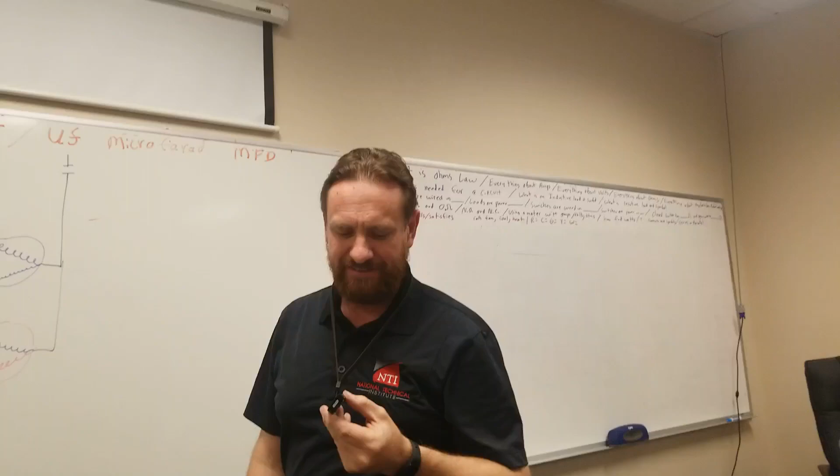All right, start kits. When an electric motor first starts up, you have an inrush of current. The electrons are flowing through this motor extremely fast, running at full speed, whatever speed the windings are supposed to be at. But the motor has lag, it's not immediately up to speed yet. It's like getting in your car and flooring it immediately. It's not going to be up to 60 just yet, and that's a lot of wear and tear on the car getting it up to speed fast.

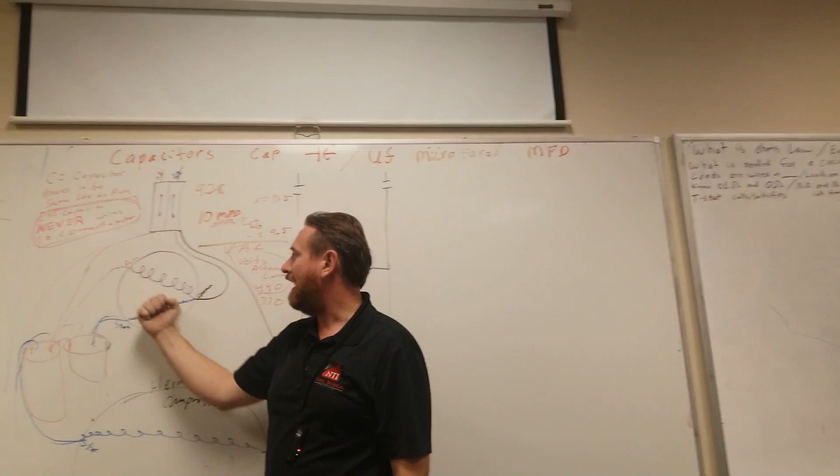So the windings have an inrush of current. As electrons flow through there, it's a very high amperage rating, and those windings get very hot. What is on the windings of that motor? Enamel, insulation. As the windings get very, very hot, that enamel starts to bake and burn off.

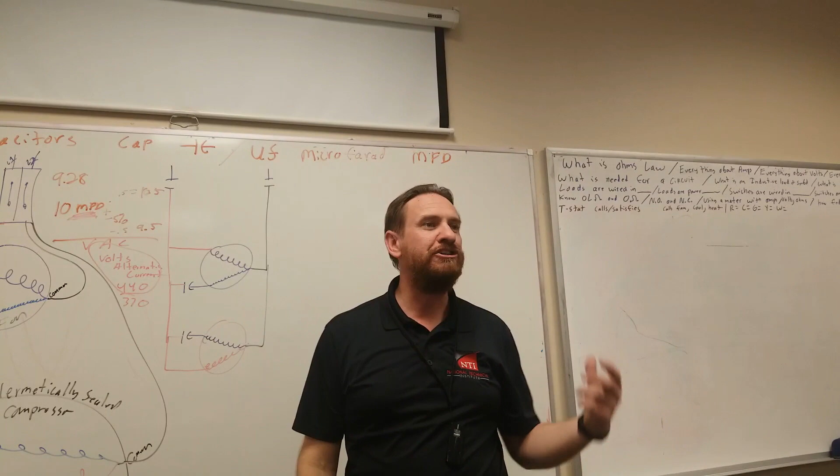Every time that motor starts up, there's a big inrush, so it damages that motor every single time it starts up, plus there's a big power draw. Plus, as all the electrons are rushing to get this motor started, you'll have a voltage drop in the rest of the house. It takes voltage everywhere else, so your lights dim, sometimes when your AC starts up, which can be hard on your electronics like your TVs. It's a big, big problem.

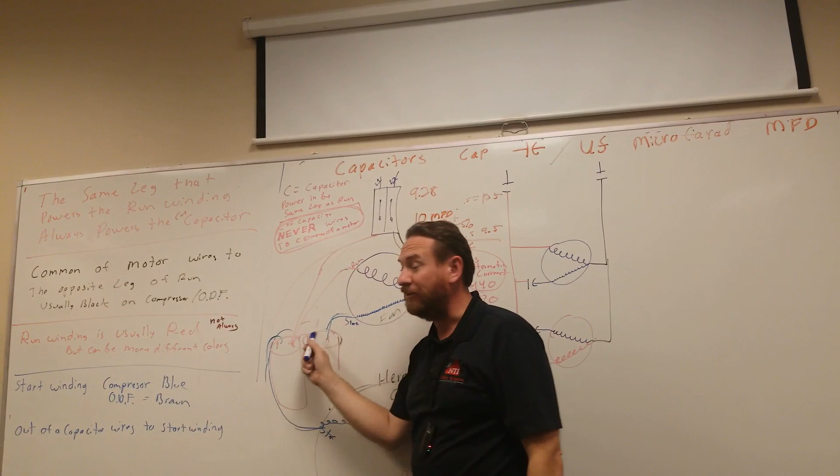Plus your capacitor has a big surge going through it as well, so it's getting very hot also. We know that heat kills a capacitor.

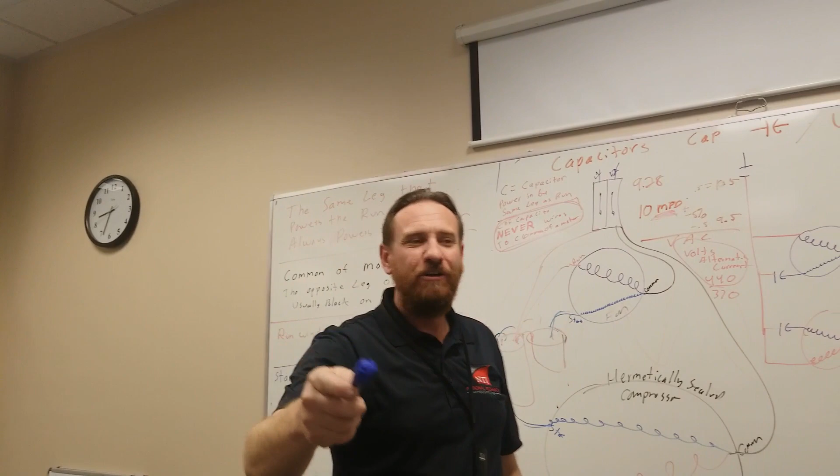When does a light bulb fail? When it gets too hot. When have you in your life noticed a light bulb fail? When it cracks, the filament separates, when it burns out. When is that? When you first flip it on, that instant little poof of light, and that's it. They're never on and then all of a sudden they just fizzle out. It's always when you first turn them on.

You had a question? When you clean them when it's wet, right? Oh, well, I've never done it. That's a temperature change, expansion, contraction, that'll do it. You shouldn't use a wet rag when it's on because of electrocution also.

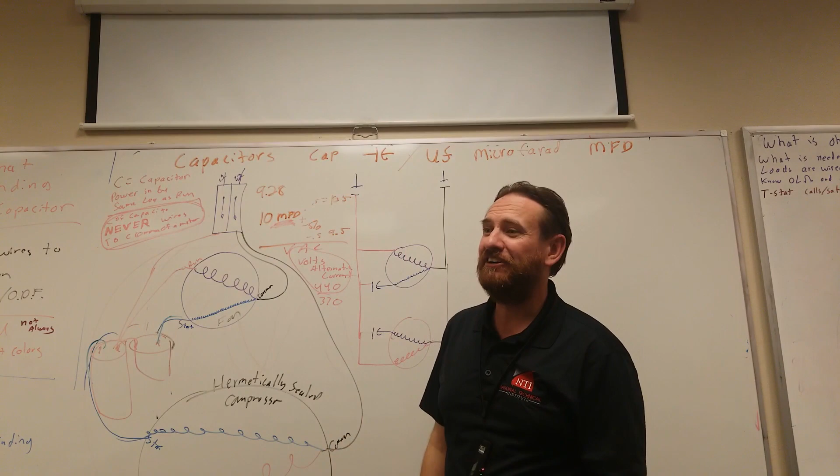You had a question? What if the light's always on and it goes out? Very rarely does it happen though. Usually, most of the time when a light bulb goes bad, it's when you first click it on, that little flash of light. They're always changing lights in the casino though. That might be an outlier, because those lights are on all the time. I imagine those last longer staying on versus coming on and off repeatedly. Well, and some of them flash constantly. Actually, all of them are flashing.

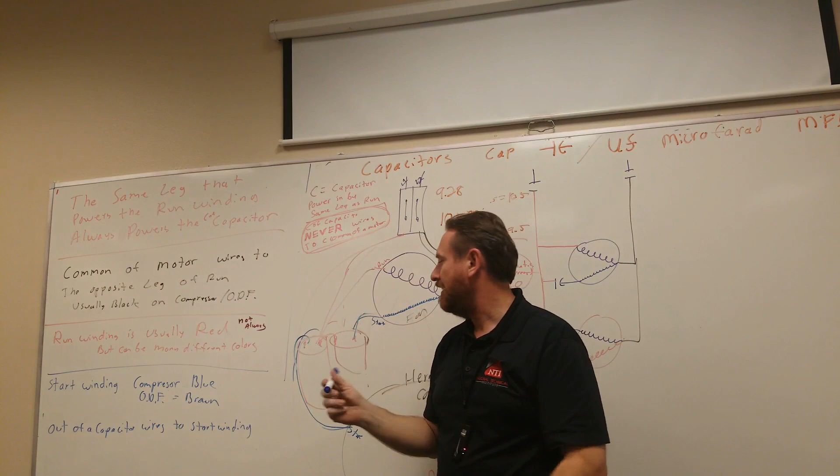But when it's cool, that first inrush of current comes on, that's when they pop. So a capacitor is the very same way. When you get that inrush of current, all the electrons moving back and forth, the electromagnetic happens and they get hot. That's when the capacitor most likely pops, when it first turns on.

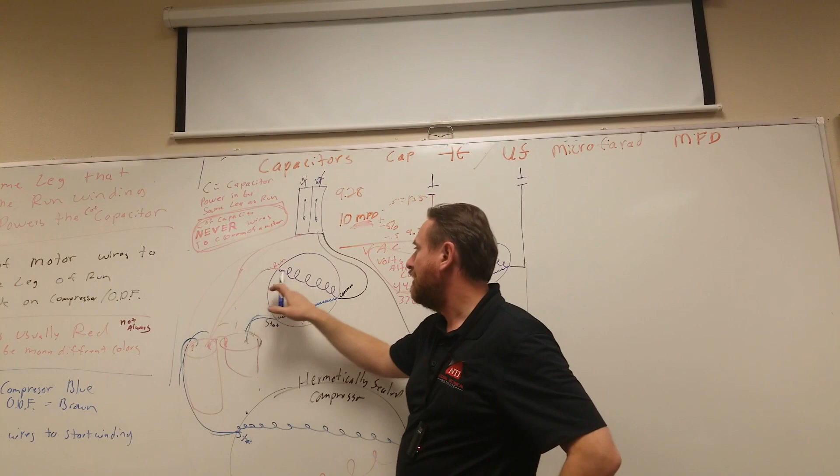So if we could add a kit to this motor to help it start. What's the hardest part about pushing a car? Getting it started, right, getting that push going. So if I could add a component to get this compressor up to speed faster, the windings stay cooler, meaning less inrush going through or having to deal with this capacitor. The capacitor lasts longer, the compressor lasts longer, and because it's getting up to speed faster, the lights don't dim down like they did.

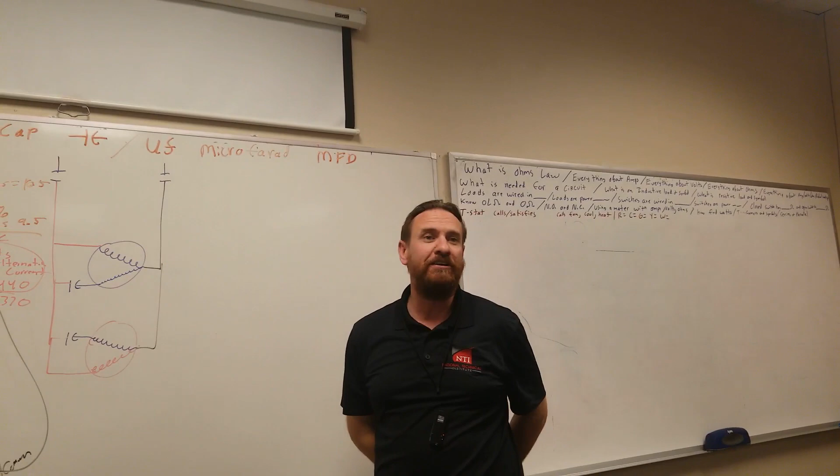The compressor is going to last many years longer, capacitors last longer, and some people say even the contactor lasts longer because there's less pitting going on every time it comes on and off. If I have one part that's going to make all those components last longer and possibly save you a little bit of money when it starts up—not that you'll see it much on your electric bill, but it saves money every time that compressor starts up—is that something you're interested in? Yes, absolutely. So it's called a start kit.

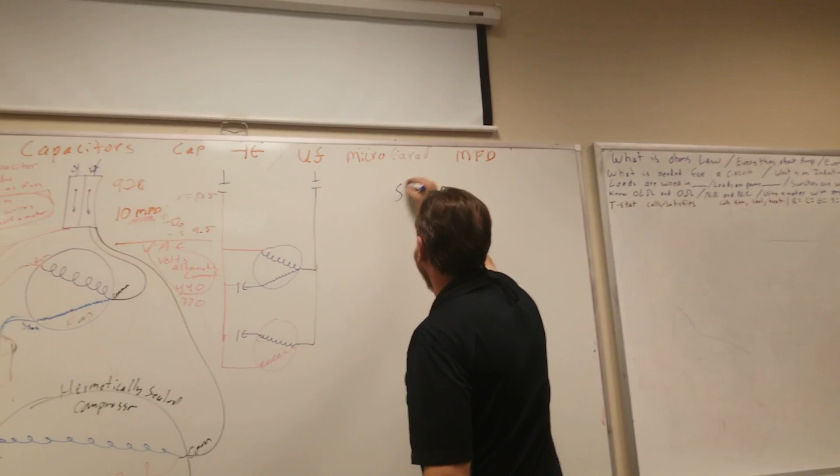They are usually mandated if you have a thermostatic expansion valve metering device, a TXV or TEV metering device—they want you to have a start kit on them. Also if you have hot climates. Can't think of anywhere we have a hot climate. Also, if you have systems that cycle on and off.

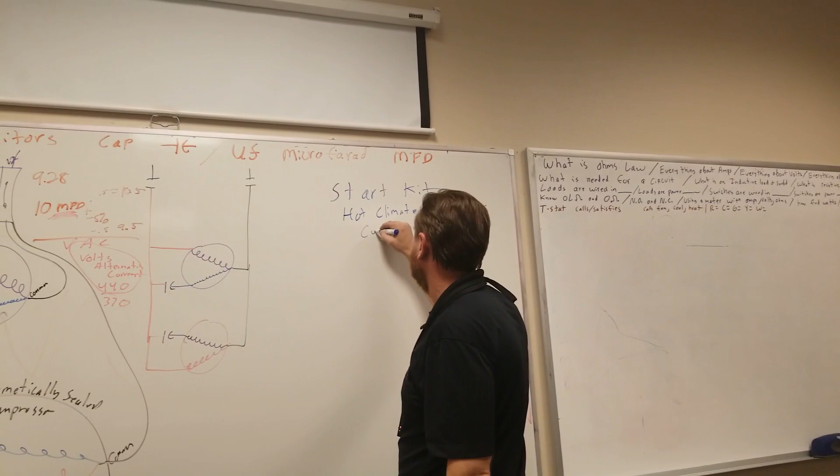Any one of those. You need a start kit. So everyone has a start kit. They should have—here in Vegas, everyone should have a start kit.

Now let's say that we live in Maine. Is there going to be as hot of conditions in Maine? No. Is your unit going to have a high demand on it? No.

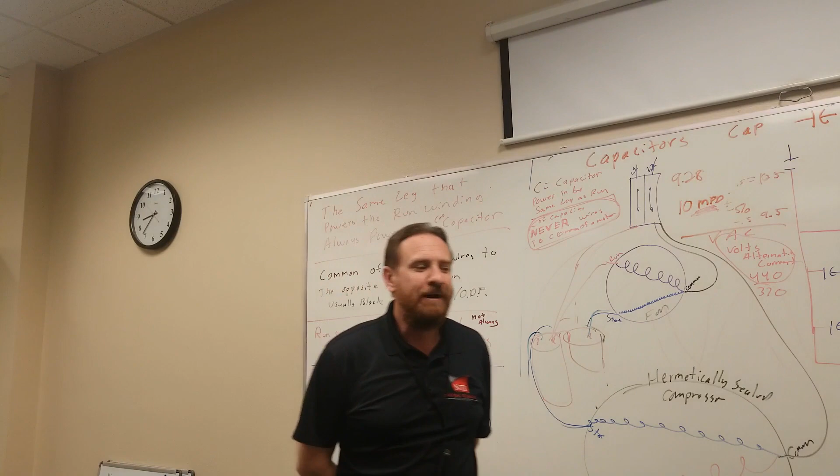So it's not going to be as important there. But in Maine you may need an accessory called snow feet. You put these feet on the bottom of the unit and it raises up about a foot or so. That keeps it above the snow line so that snow doesn't build up all around the unit and rust it out faster. That's some accessory you'd probably need to have in Maine, more so than a TXV.

Now here in Las Vegas, do we want snow feet in the units here? No. If we have that much snow here, we have way bigger problems than the AC, right? Okay, we have big problems.

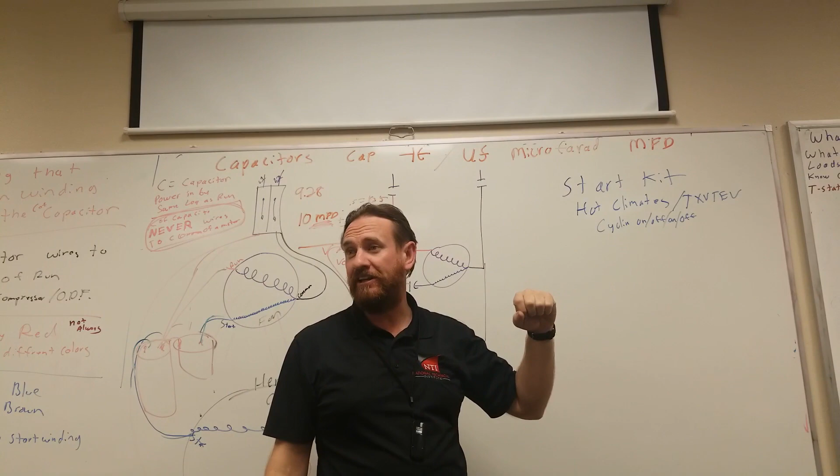So what they do is they build the units, a base model unit, and then you customize it for what you need. Most units have a regular fixed orifice in it. You like a TXV, you buy the kit. You guys don't like TXVs, it comes without it, it's cheaper.

Same thing with start kits—they don't have start kits with them from the factory. We all know in Vegas, a start kit's going to be better. So you can add the start kit to it. It's pre-assembled, you just got to plug the wires in the correct spot, and it helps that unit last longer. Every unit here needs one.

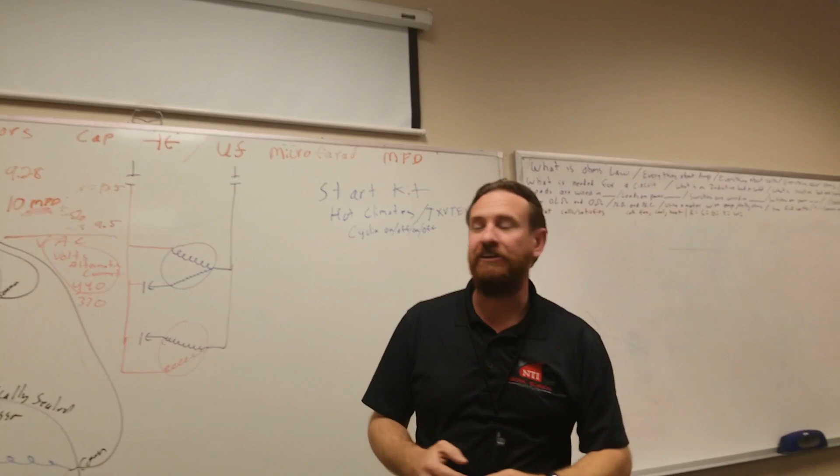I go to every customer I have and they have a bad capacitor, I'm already putting the capacitor in. Hey, I got a brochure I leave them about the start kit. They don't have one. I explain the benefits of it, explain what it does, and then ask them, is that something that you'd like to have?

And they'll say, well, how much is it? And I'll say a price, and I say, and we accept credit cards. And they say, yes, put it in. Price, we accept credit cards. We accept Bitcoin. How much do they cost?

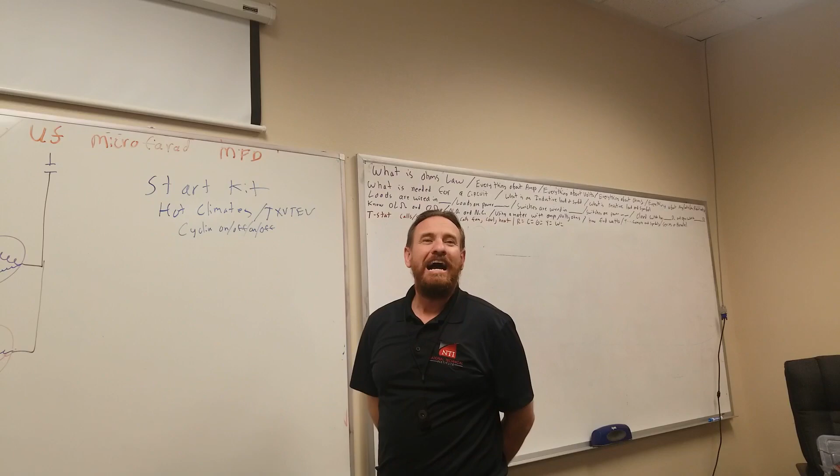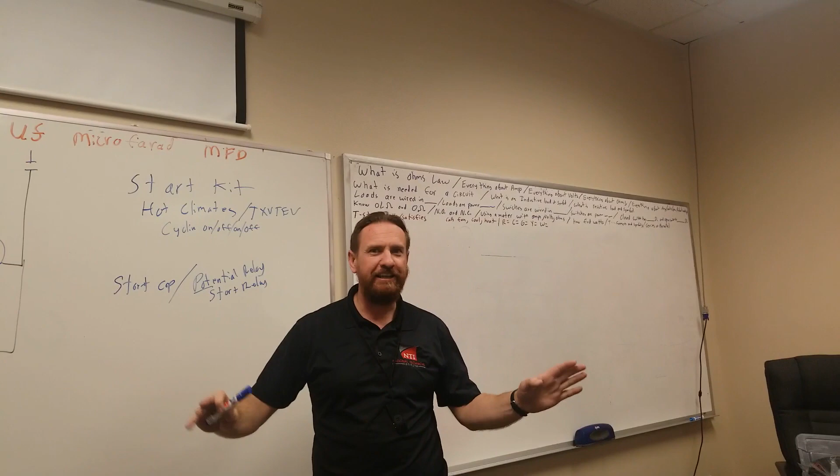Our cost for a start kit, which includes a start capacitor, and it includes a potential relay—a potential relay, also known as a start relay, also called a pot relay for potential, not for anything else. I know this is Vegas. It includes that and usually the little wiring setups you need in it. Our cost is about $50.

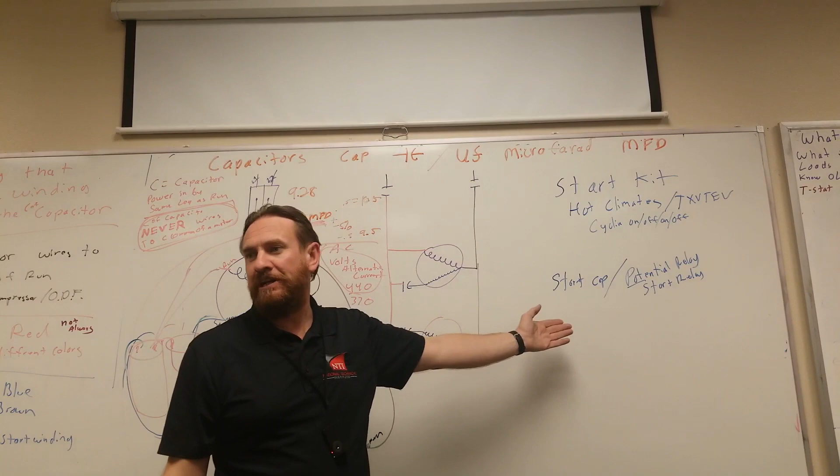Not bad at all. You sell them for $250 or $300, and I'm already there making money on something else—I'm already making money on a capacitor. So when I put this in, I don't have to make as much money on this. But there's companies that put those in for $500, $600 easy every day. There's one company I know that sells those for $800. Still worth it.

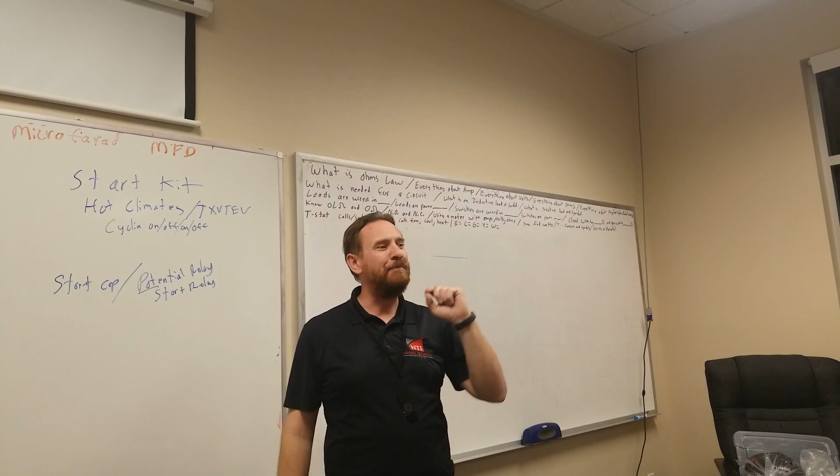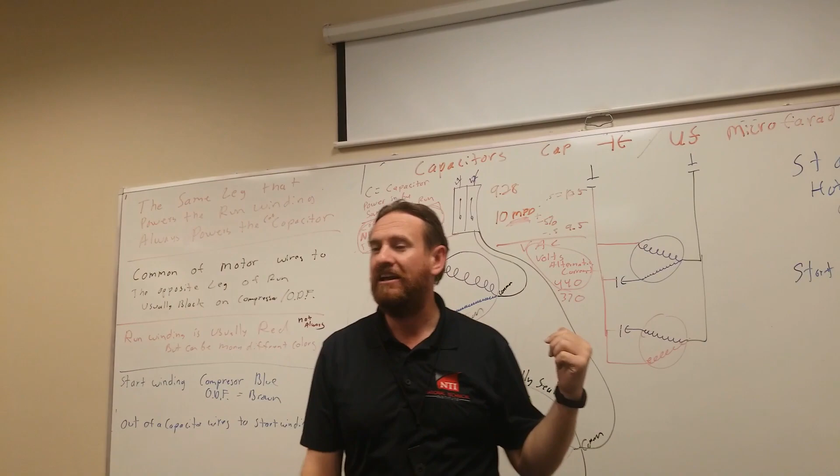These things are so awesome. You can have a compressor that won't start at all—your compressor can be bad, won't even start. Turn it on, the outdoor fan motor comes on, the compressor goes ding, shuts off, won't even start. I can put this on your house and get that compressor running a lot of times, not always, a lot of times, and I can get another maybe 2-3 years out of that compressor that would not start by putting this kit on there. If it can extend the life of a compressor that's already dead, imagine what it can do to a compressor extending the life of while it's new.

What's the picture? Picture? This? Oh, I didn't draw a picture of it. Well, who cares about a picture? Let's see the component. I'm a visual aid guy.

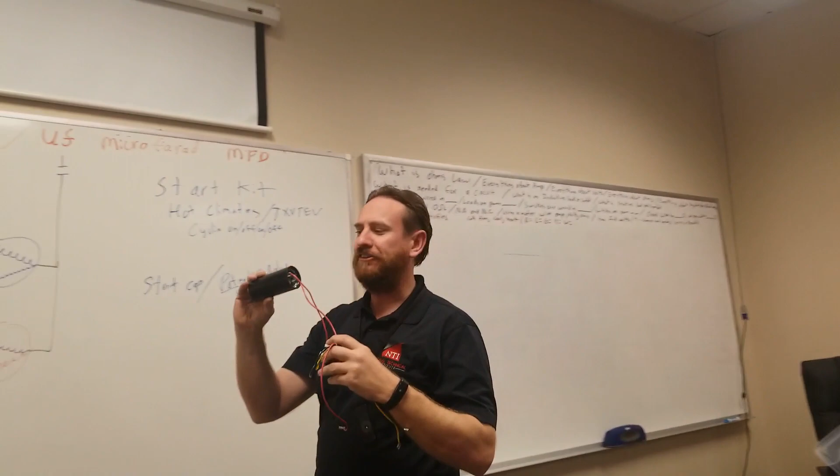All right, a start capacitor. They're usually black, with plastic housing so it doesn't have to be mounted metal to metal. You can cable tie it somewhere in there, just wrap the cable tie around it. It has a little foot on it, with a space for a screw.

In the unit somewhere, there's usually an extra free screw already there. You can unscrew that, because they know most places are going to need a start kit. You put that screw in right there, and you have three wires to hook up.

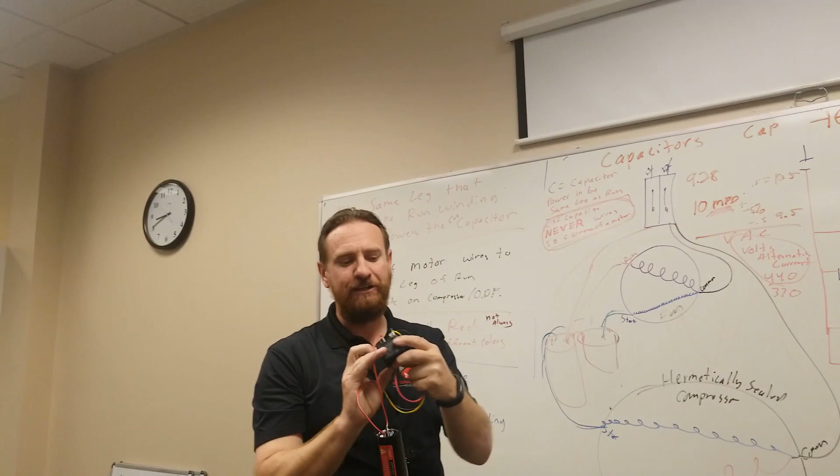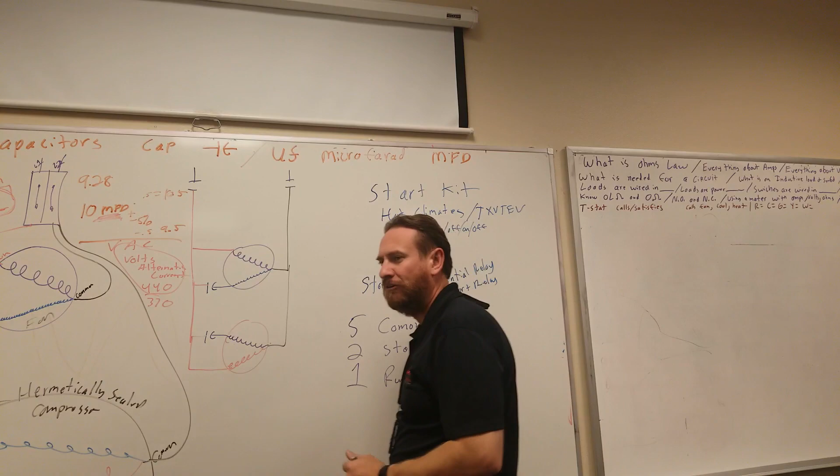On this relay, it has numbers 5, 2, 1, and wires labeled common, start, and run to the capacitor.

Looking at this relay, the number 5 terminal is black. What do you think that's going to go to? Common, with the rest of the commons from that compressor—there are two black wires in the contactor. Guess where this goes? That's right, with those. It's hooked to the number 5 terminal, which is common. Then the number 2 terminal.

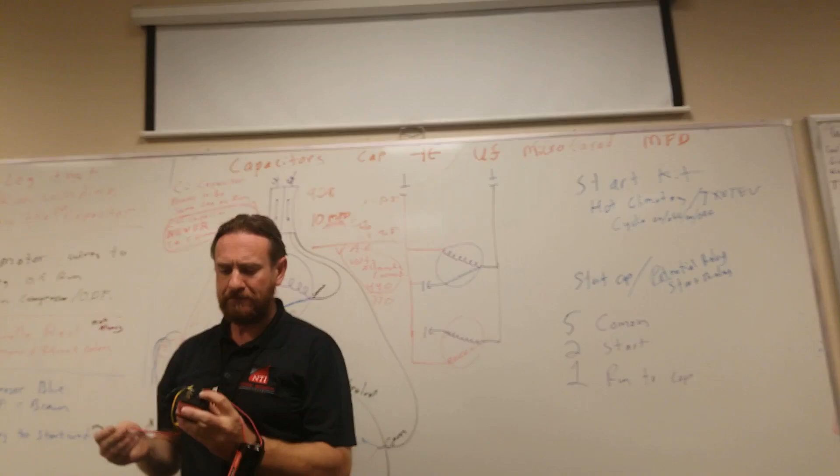Number 2 terminal is start. Well, where's the start winding? This helps the compressor, so where's the start winding for the compressor? Here, but I can't put it there—where else can I put it? Put it right there. Oh, right there—they give us extra spots. I put this one right there.

Then the last one says run, to the capacitor. It's also red—what color is red usually? Run. It goes to the capacitor, to the number 1 terminal. So the same leg that powers the running powers the capacitor. I put it right there. So one goes here, one goes there, and common goes over here.

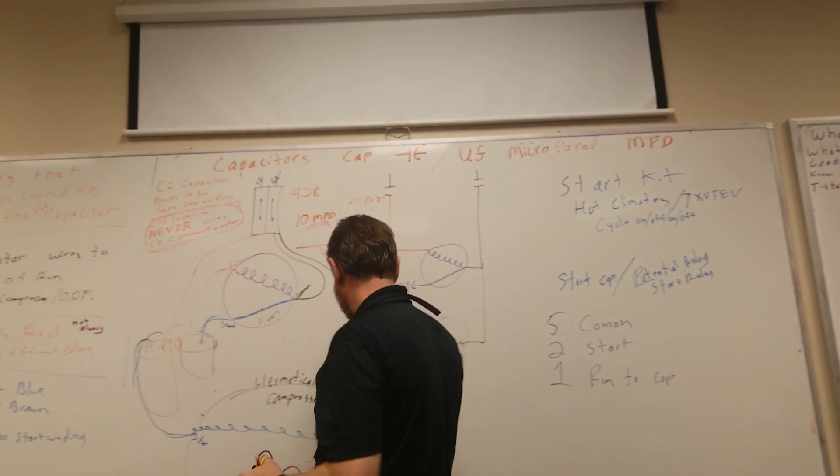That's it, that's how they wire it—really complicated stuff. They even have a diagram on the thing. When we open it up, we see a little relay on there and a switch. The switch is normally closed, so if we were going to wire it in, it would wire something like this. That's how the wiring looks. You don't have to draw that right now—I'll have one I'm going to send you.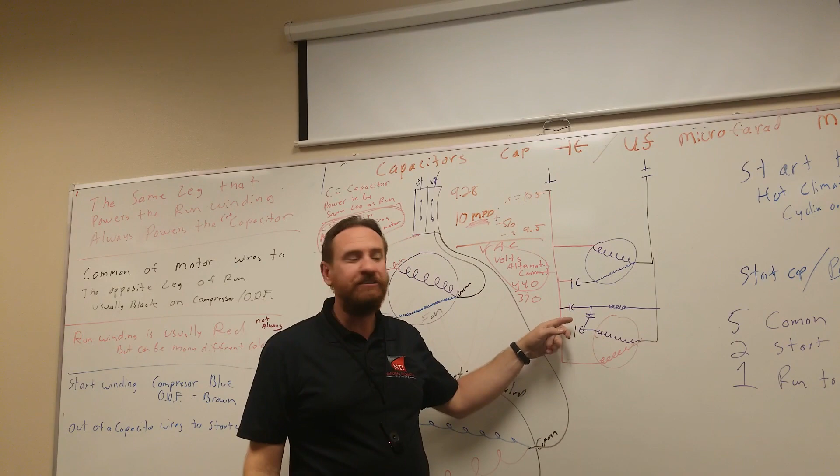What happens is this capacitor and this capacitor are wired in parallel, which means we simply increase the plate size of both capacitors. This one here is 227 microfarads, between 189 to 227, a big capacitor, plus whatever capacitor my actual run capacitor is. So we have a big charge when it first gets up and first gets that compressor going.

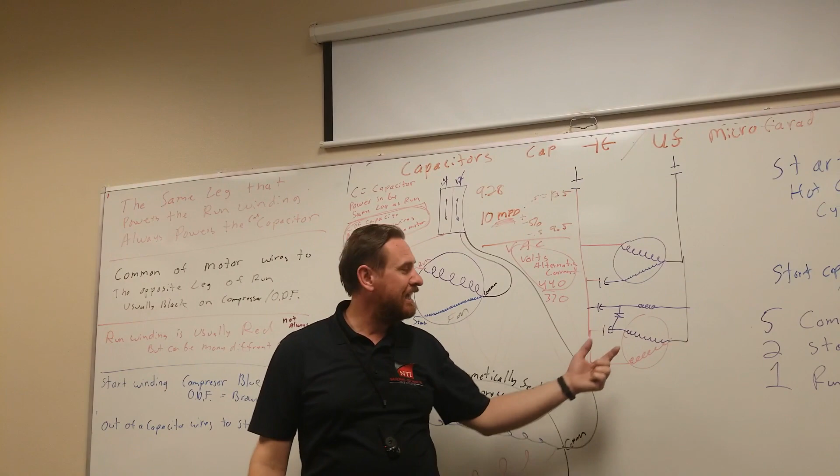Heavy hitting microfarads gives that big boost through the start winding, that big surge to get it going. Once I get that compressor up to about 75% speed, this start winding, in a sixtieth of a second, also becomes a generator. It's creating higher voltage, so the potential difference across both sides increases. That higher voltage goes to this very high resistant coil, electromagnetic coil. Once I get it to 75% speed, I have enough pressure to make amps flow through that coil to create an electromagnet.

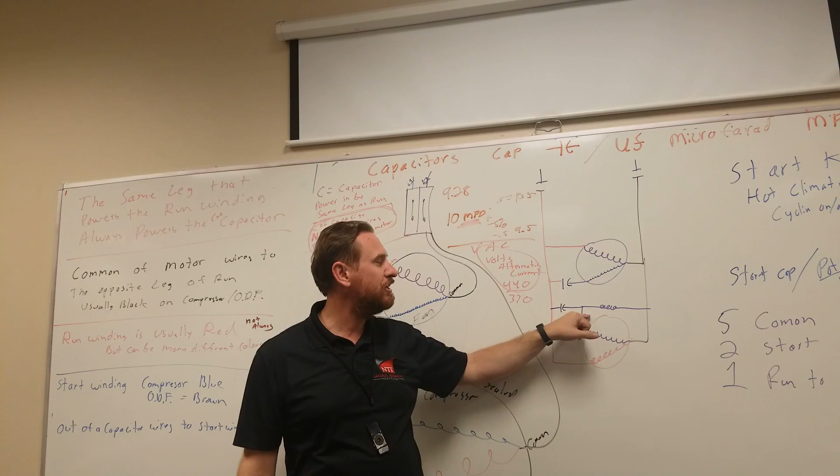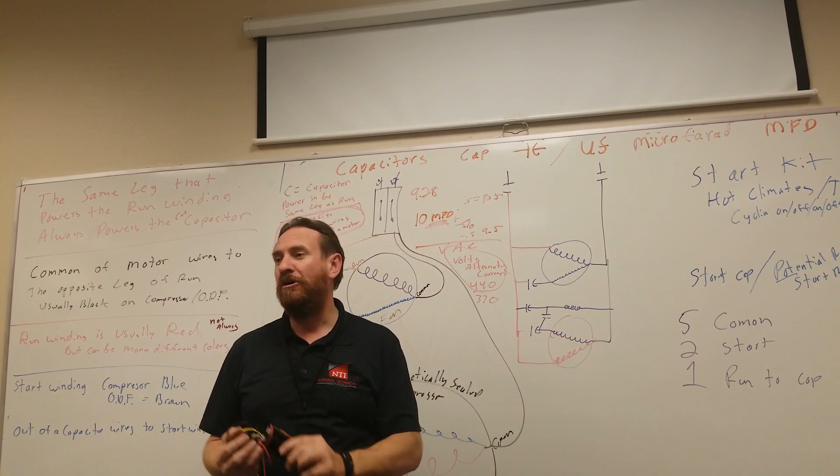That electromagnet then opens this switch. Once that switch opens, it takes this out of circuit—it's only used to start the compressor, then it pulls it out so it's not there anymore, only to help it start. If you try to wire this in all the time, it will either burn out the start winding with that big surge, or it will blow up this capacitor. So I'll pass it around, and you can take the cover off and see the coil in there.

And I have one that's blown up.

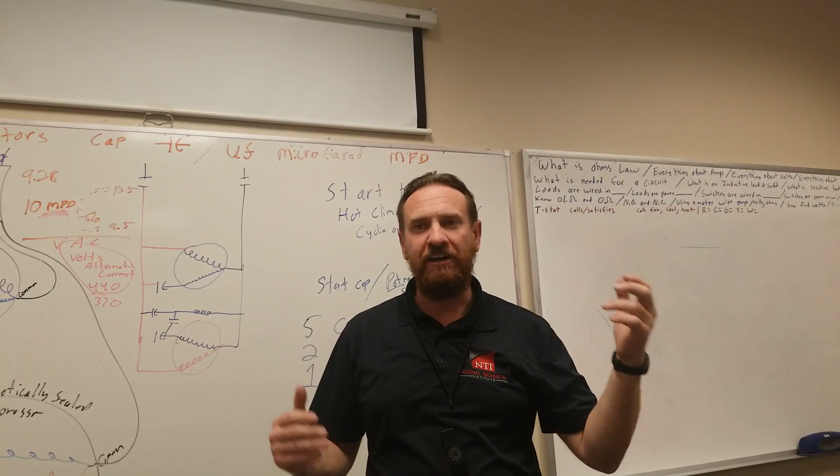There are several people that make them. This one is called the 521 Compressor Saver—that's the brand, 521 Compressor Saver. They have three sizes: a 1 to 3 ton, a 3.5 to 4 ton, and a 4 to 5 ton or something, I can't remember the numbers exactly. But you get one size for that unit.

All right, so it's a start capacitor and a potential relay. They have different sizes—here's one that's still in the package.

I'll pass it around the other way. Don't open it, I still may need to sell this one day. I have my sign that says, 'Will HVAC for food.' Someone might pick you up, maybe someone in a Tesla. Yeah, that's the first thing I ever seen.

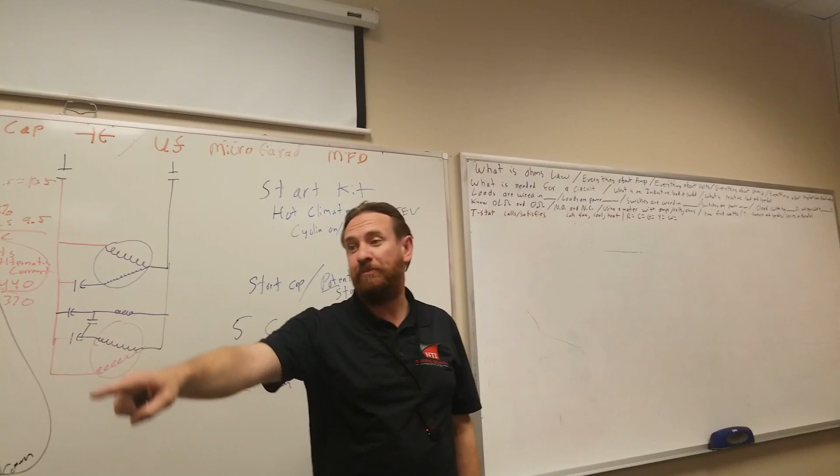Those are the ones with 3 wires. So if I have it hooked up, there's 3 wires. The black one goes to common. The red one goes to run, which is this side of the capacitor, and the other one goes to start, which is the other side of the capacitor. It's not hard to do, and there's pictures on the back that tell you exactly where the wires go. It's really not hard.

So there's people out there who go, 'Oh, I can't wire these.' Really?

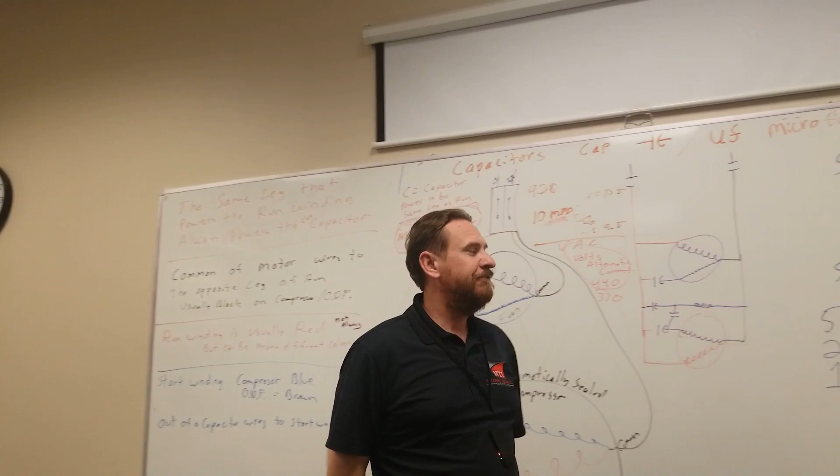One thing I want you to know is 5-2-1, common, start, run. So when you go to an interview, somebody may ask you, 'How do you wire a start kit?' and you're going to say 5-2-1, common, start, run. If they ask you to draw it out: 5 goes to common, it's black with the rest of the commons. 2 goes to the start winding on the output of the capacitor. And 1 runs into the capacitor to terminal 1 of that relay. Boom, you've explained how to wire it, and they'll say okay good and move on.

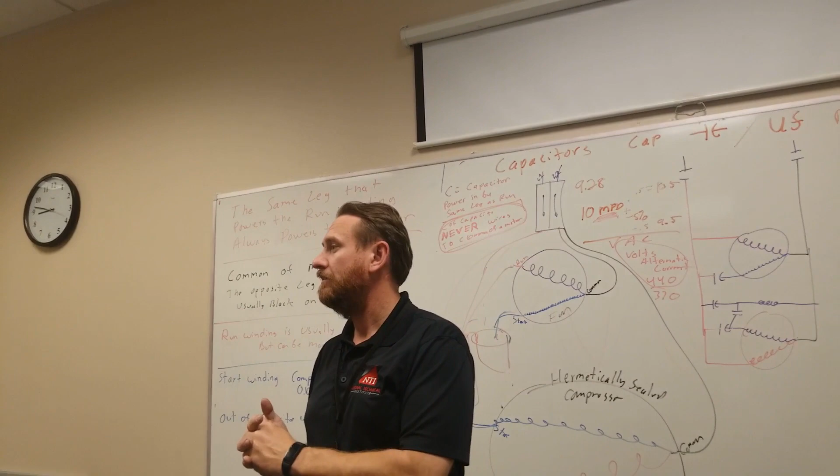Yes. Don't ask them those kind of questions, don't challenge them because they'll challenge you back. It's not like 'don't challenge me in class,' I'll challenge you back. Yes, sir.

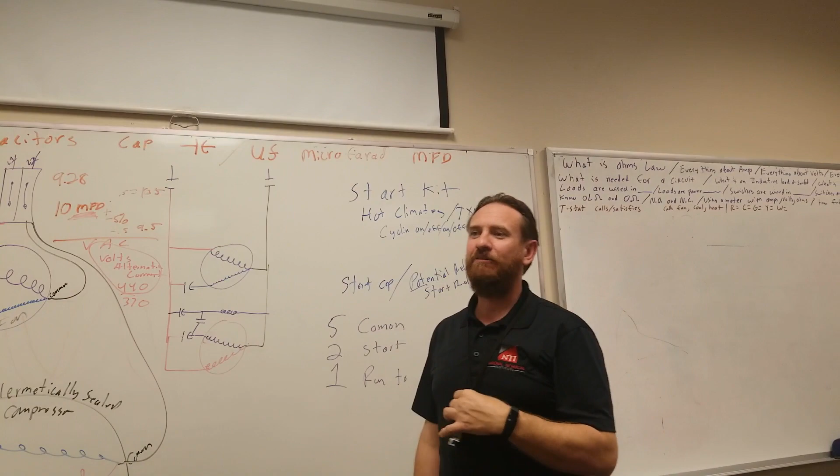What is that? It's a transformer that varies, and they also have variable capacitors that vary, but we don't use them very much, so we're just going to skip that. I don't have the time to get into that anyways.

5-2-1, common, start, run. They also make other types. There was a company that had problems because their technicians couldn't wire those. Some companies want you to wire one from scratch, but you really don't need to because they come pre-wired. I could spend all the time teaching you how to wire them all through, but if you can remember 5-2-1, common, start, run, you'll get the gist of it. They have wiring diagrams right on there. If you have one in the truck and need to wire one, just pull the package out, it tells you how to wire it right there. I don't want to spend all that time when there's more important stuff to learn.

How come the fan doesn't have one? Because the fan is very small and there's not much resistance against it, it just has a blade to turn. As the fan gets up to full speed, there's more air weight against it. But the compressor has to turn a piston, connecting rods, and valves, it has a whole lot of work to do and weight to move before it gets up to speed. It's the bigger motor, it needs that help. The fan motor has very little resistance when it first starts, and as it gets up to speed there's more resistance. It doesn't need that, but this big guy needs it.

Sort of like one's like trying to ride a bike versus trying to start a car. Actually, it's like trying to push somebody riding a bike versus trying to push somebody driving an 18-wheeler.

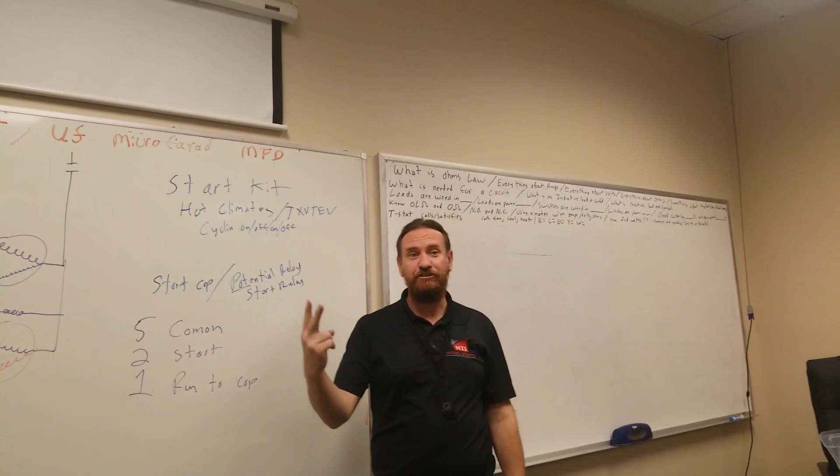Just really drive that home. So there's another guy who said, 'Oh, that's too complicated, getting my guys to wire those 3 wires.' There's people in the field who say those 3 wires are too complicated to wire. Really? 5-2-1, common, start, run. The blacks go together, that only leaves you 2, and then it tells you 2 goes to start, and it tells you the color, the yellow one's going to... that's when you tell me. It's literally not hard, I'd rather test about this 8 million times. So, but they made one that was simpler, a 2-wire version.

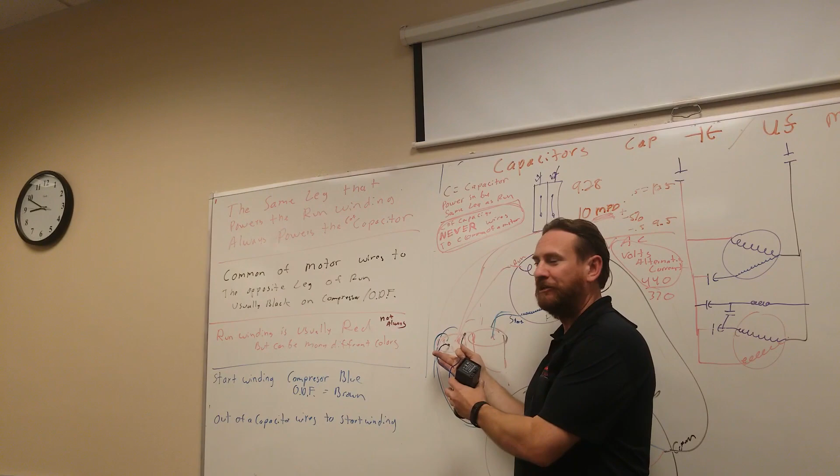You take a blue wire and put it on one side of the capacitor for the compressor. Then you take the other blue wire and put it on the other side of the capacitor.

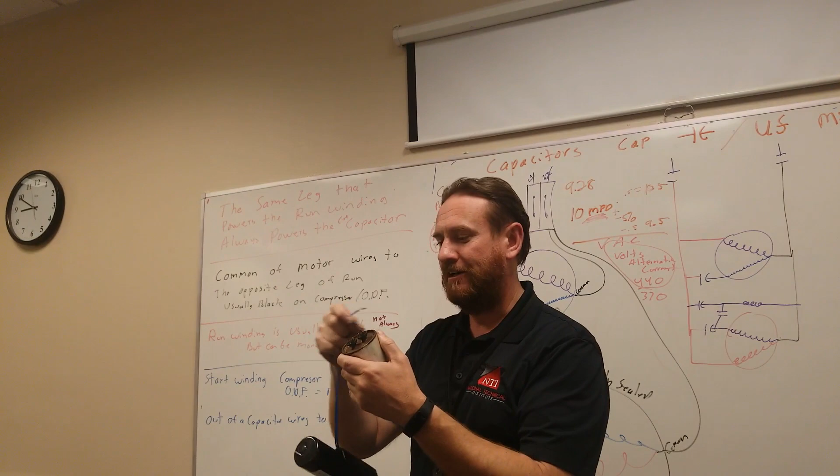So they made it harder? So in case you guys missed that, here's my compressor, and I take a blue wire. Does it matter? The other blue wire. Doesn't matter, opposite side. So it does. Do they have a simpler one?

Oh, you would be surprised. It doesn't look like a can.

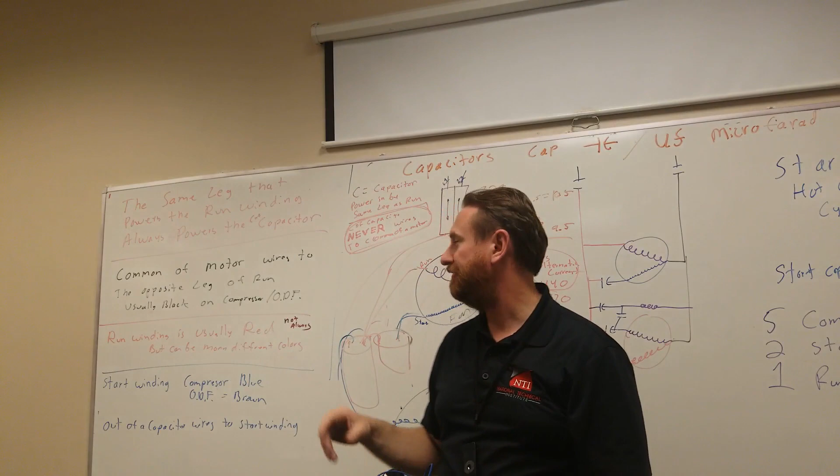We had a guy that worked for a company in Texas, and he went out installing these, and he hooked them between C and fan. So he's sending 225 microfarads to a little bitty fan motor. We had to go back and replace all the fan motors because it burned the start windings out of all of them. Factory smoke came out of those fans.

So it's a 2-wire. This is a brand called Kickstart, but it still has a potential relay and an actual capacitor built in. There's other sizes too. Here's the bigger size one that somebody pulled one of the wires out of.

So it's a larger one, but on the package it says the size of units they work with. Still, it's 2 separate components, but it's still 2 wires, blue and blue, one side of the capacitor and the other. I prefer the other ones just because I can wire them.

You get people that are on teams, saying I like this one better and that one better, but if somebody says I like this one better only because it's 2 wires, I'm like, really? That's your 5-2-1, common, start, run. That's what you're worried about, because there's 3 and not 2. Come on, dude, that's crazy.

Another brand that I like really well is called the Amrad.

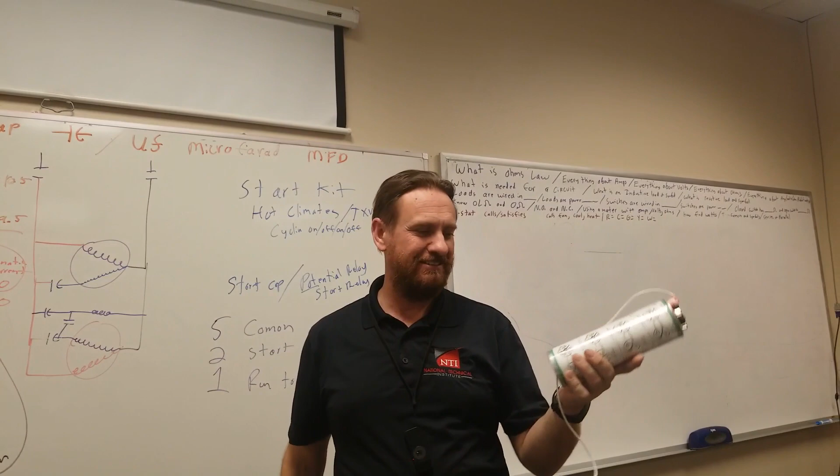Did you get half of that one? Yeah, I did. What's this? You got pens? I don't have pens. This one has, they come with markers though. You can put the date on it. That way, you should probably use those because that way you actually get a date.

So this one actually has the relay built into the capacitor. It's all sealed, so it makes it nice and simple. Plus, it does all the different sizes. There's another style like this that does them as well, covering all the different sizes for your start kits.

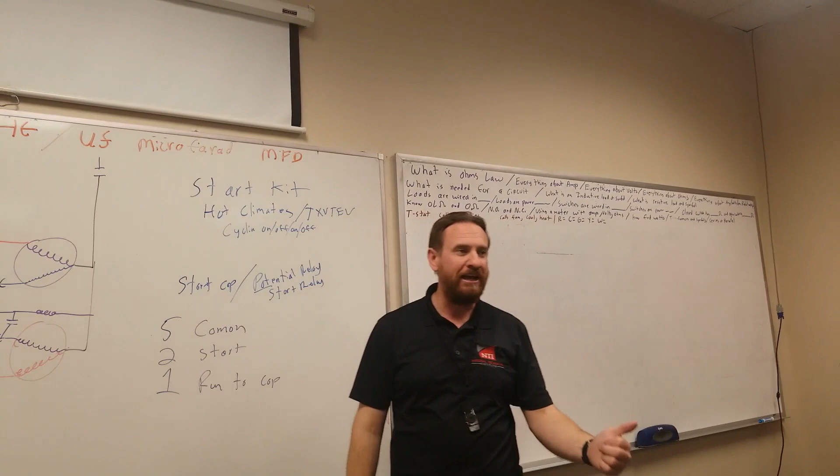So if I was going to put one in, I'd use the 521 Compressor Saver brand, the Kickstart brand that's 2-wire, or the Amrad brand that has many different options. Those are the ones I would put in. Now, in the field, you're going to hear some people say they don't like putting start kits in because they damage compressors. These will not damage compressors. Once it gets up to speed, it takes the start winding out of circuit.

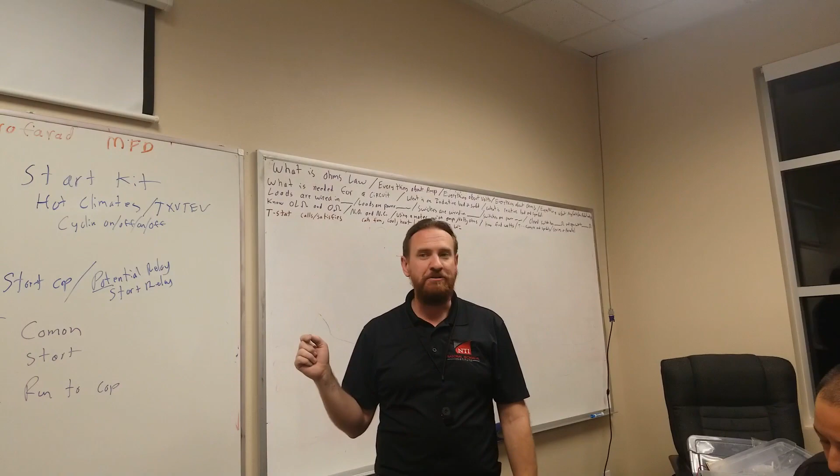There are other ones that will damage the compressor, okay? So let's talk about those. They're cheaper, like $50, but they can sell these for like, I don't know, $15. People are like, whoa, $15?

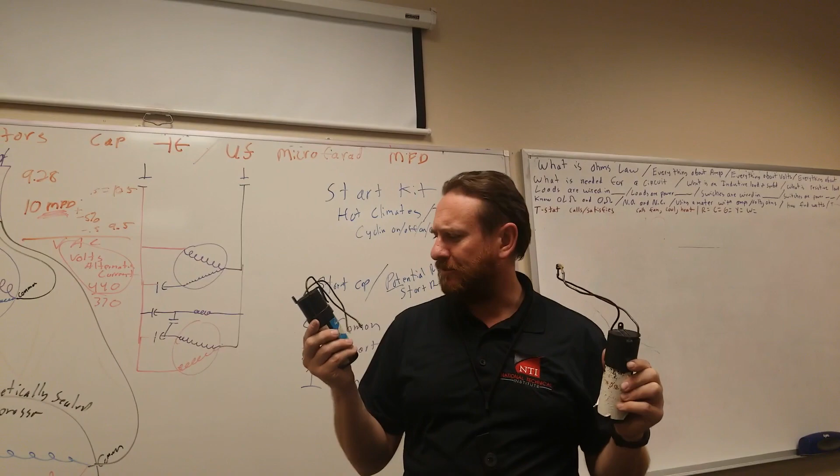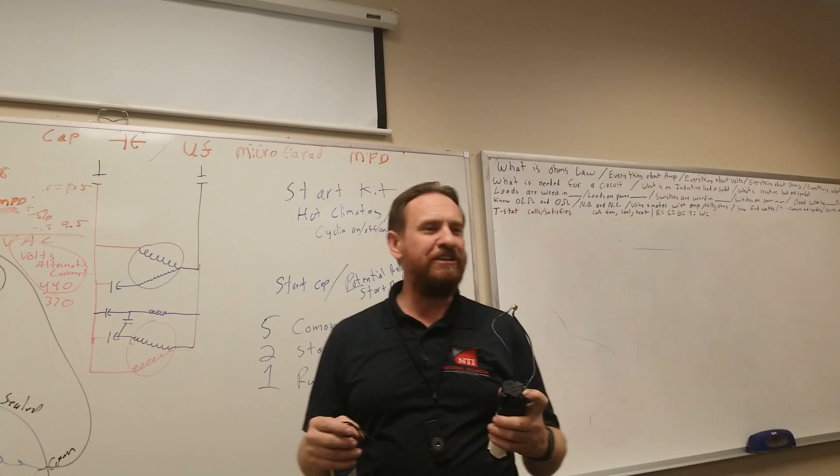What's the catch? Here's one, a Supco brand called Super Boost, and this one I forgot, I think this is Super Boost also. Anyways, what they use in here is not a pot relay. They do not use a potential relay. They actually use what they call a positive temperature coefficient, a PTC. All there is in here, if you open it up, there's two different plates in here. They use temperature, so when the electrons are flowing through this so fast, that plate gets hot, and as the plate gets hot, that's what disconnects it.

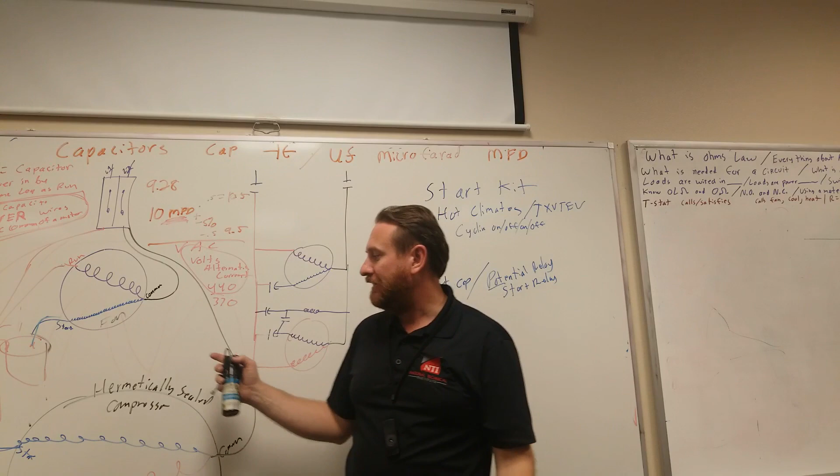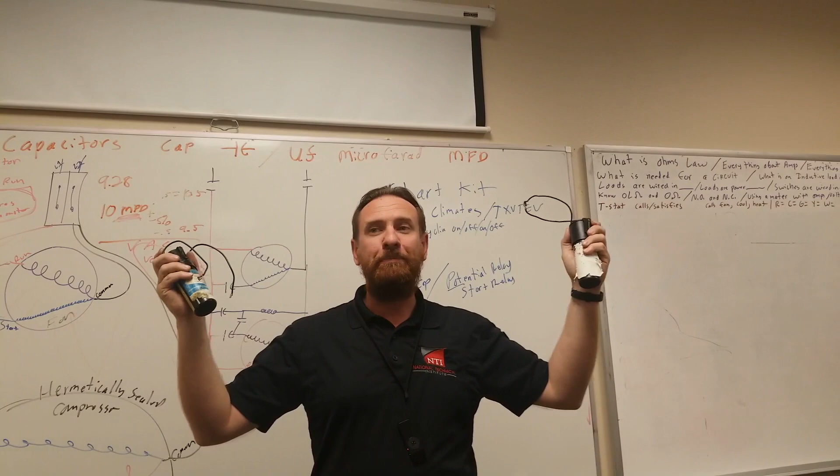Solely off of temperature. So on a cooler day, or under the right conditions, this could stay in circuit and send too many microfarads to the start winding for too long, which could damage the start winding. These can damage the start winding. Also, if this is already warm and the compressor is running and then shuts off and tries to start again, since it's already warm, it doesn't close back to help the compressor start. So the compressor is trying to start and it can't, because it's off of a PTC temperature coefficient. I call it a POS start kit. These are the ones that will burn out. So if you hear somebody saying those start kits will burn units out, I'm telling you these are the ones that will burn units out.

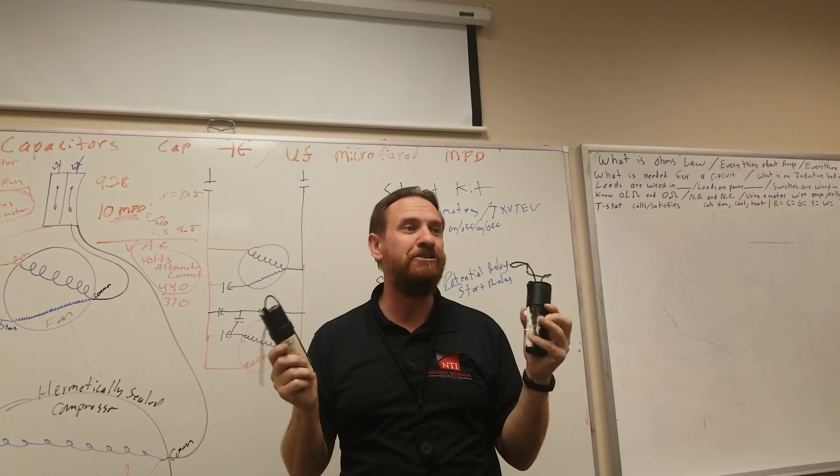I pull these off of units and put in the right one, because these are junk and will damage the customer's equipment. Just because these are bad doesn't mean all start kits are bad—don't go stereotyping them. These particular ones are bad, but there's 3 other brands that work really well. These are junk, those are good. These wear it out, those extend the life. You would never install these. Hell no.

Now they make one like this for refrigerators. Refrigerators work completely different—they actually work decent for some refrigerators to buy time, but it's replacing parts. It's a long story. For HVAC components, do not use these. These are crapola.

You call it a positive temperature coefficient? PTC, positive temperature coefficient, yes sir. What's the 3 brands you like?

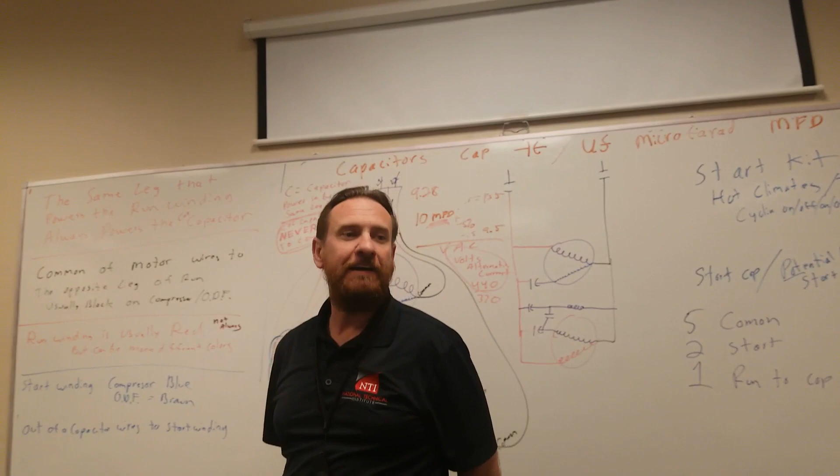The 521 Compressor Saver is one. The other is a brand called Kickstart. And last but not least is the Turbo 200.

I don't get paid to sponsor Turbo 200, but it's a good product—I like it, I believe in it. I don't get paid by Jameson either, but it's a good product. I like it. Exact same, I think—you get the same quality every time.

Yes sir, I noticed Kickstart had a 4 on it—what is that? Say what? The Kickstart had a 4 on it? Where's it at? Show me what for. I don't know this 4 you speak of. I think that's it. Okay, let's see. Do-do-do-do. Weird—yeah, I had a question about that one.

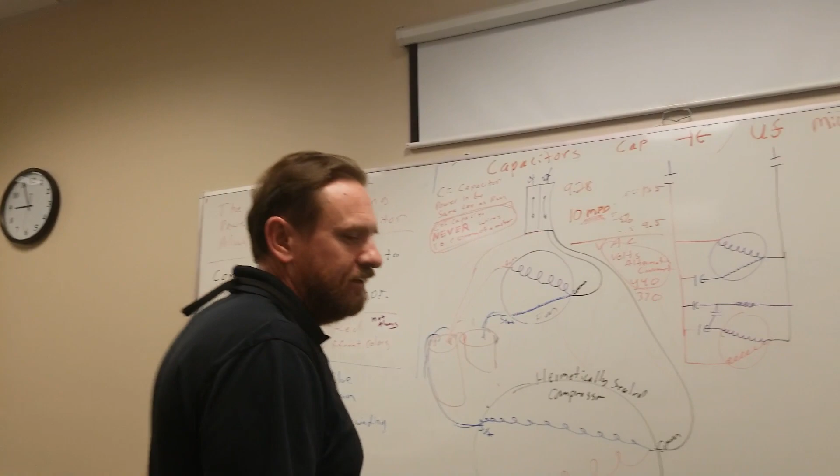There's a light... 4. Oh, there's no terminal there. They make other ones that have different points, like 4s and different numbers, but we're not worried about those. Some applications require them, very rarely, and if you do there'll be a wiring schematic for that, for a reason.

So, this piece on here—what is that? Is that a resistor? Let's see what this point is you're talking about. Yeah, the little colorful tube thing. Is that a resistor? I mean, why is it there?

That is the resistor—it's called a bleed resistor. Those hold a massive amount of microfarads; there's a lot of plate size in there, so it can be dangerous. What they want is a bleed resistor so that over time it bleeds it from one side back to the other. It's not as quick as those I gave you guys, but it keeps it from holding a massive charge over a long period of time, so it's not as dangerous.

So that'll eventually equalize itself then? Yes it will—slowly it will allow it to equalize. And you can actually count the colors of the bands and calculate what the resistance is of those.

So this says 4 to 5 tons—does that mean you can only use it on a 4 to 5 ton? Yes, that's correct. I do not want to use that for a 3.5 ton, a 3 ton, a 2.5 ton, a 2 ton, a 1.5 ton, a 1 ton, or a half ton. If it's not 4 or 5, then you go with something else.

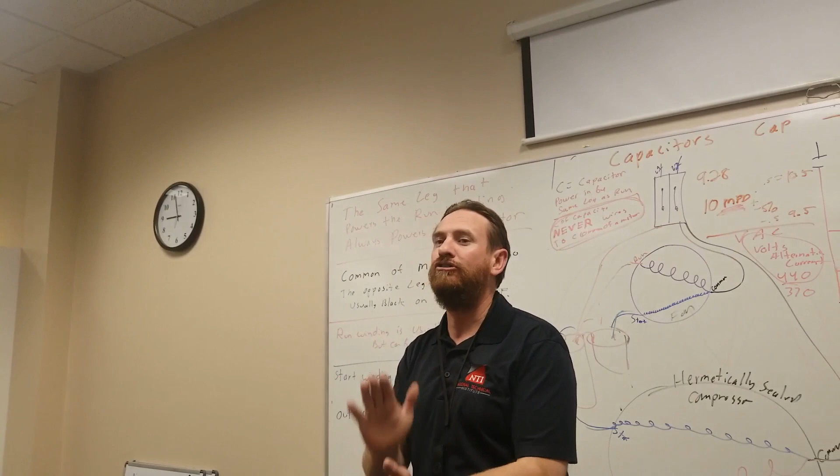So in other words, there's really two different sizes that fit just about everything. I'd stock several of those on my truck. I want to have enough so I don't have to go back to the supply house—I want to go maybe once per day, restock everything I need, and go do all those service calls. Because if you need a part, go to the supply house, wait in line, get stuff, eat some donuts, go back to the call, then need another part again—you kill a lot of time, plus you gain weight from all the donuts. I'm serious, it's a real problem, a real thing you need to be concerned about.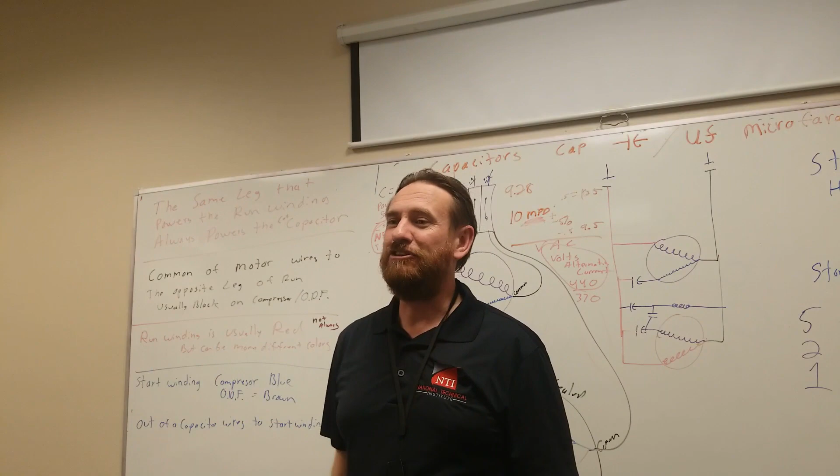Some companies, though, have a guy diagnosing units. So you diagnose a unit, then they have another guy go and replace the parts—he's a parts changer. And they'll have another guy who runs parts. So this guy says here's what I need, and a dispatcher sends that guy to go get the parts while they send you to the job. By the time you get to the job, he's getting there with the parts, and it works very efficiently. Some companies do that.

Right, so what is this? What do we use it for? Capacitor, metal. Keep it upright when possible.

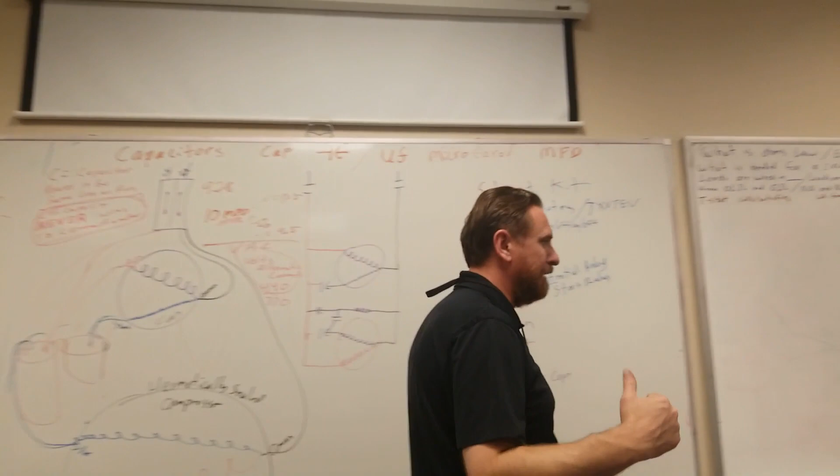What's the difference between a run capacitor? What's a run capacitor look like? The run capacitor.

It's usually metal. What's a dual run capacitor? It's a big one that's two capacitors in one, right? What's a start capacitor look like?

That's plastic, much higher microfarads, only for starting, temporary use only. And then what's the difference between a start capacitor and a start kit?

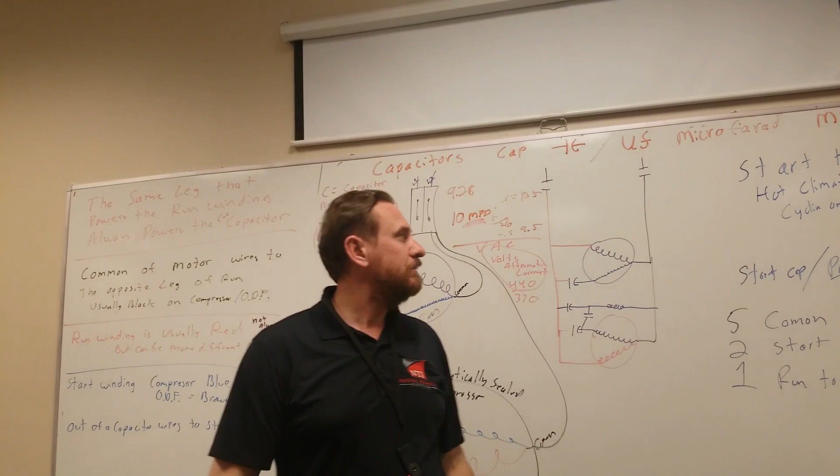Now, I was going to ask this question, but is this where the start kit is? This right here? Yeah, that's the start kit. I'll draw them better for you guys. But this essentially is the start kit. And the start kit, you guys are going to hear some older school people...

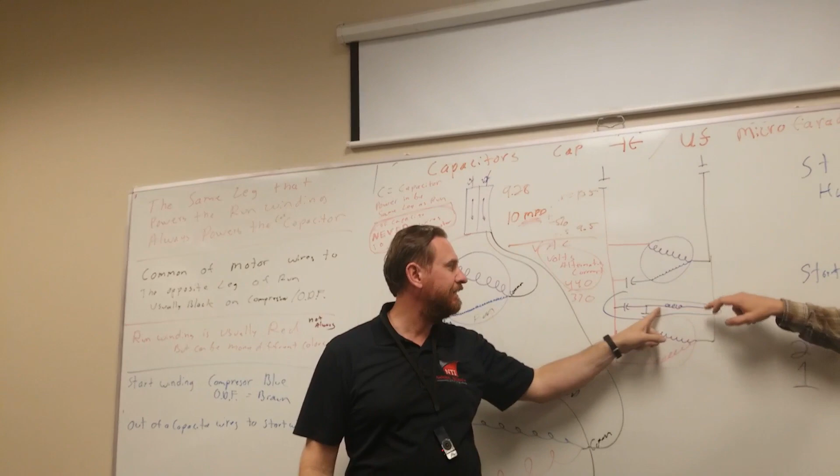I asked the wrong question. I meant the potential relay. Oh, that's this potential part. The relay is this part. Okay, got it. The relay is...

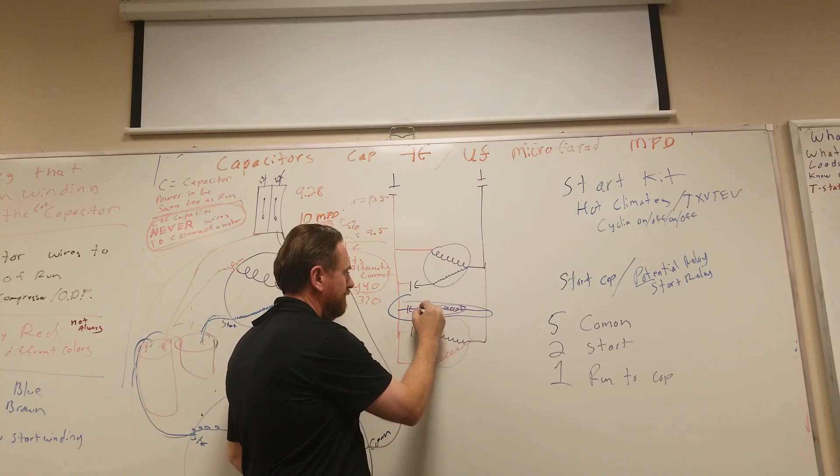This is your relay. And we can label this 5, common start, this would be 2, 1. 5-2-1. Common start run.

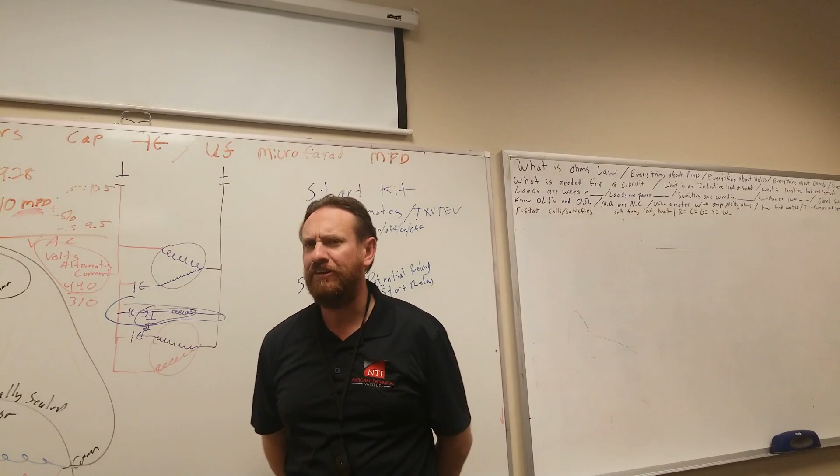You're going to hear some people call the start kit a hard start. It took me a long time to get away from it because everybody I knew called them a hard start. But really a hard start is not the proper name, because a hard start implies that it's only when the compressor is having a hard time starting. A hard start just sounds like, wait, you're going to put a hard start on my unit? Is there a problem with my unit? All these questions, oh my gosh, what's going on, blah blah blah.

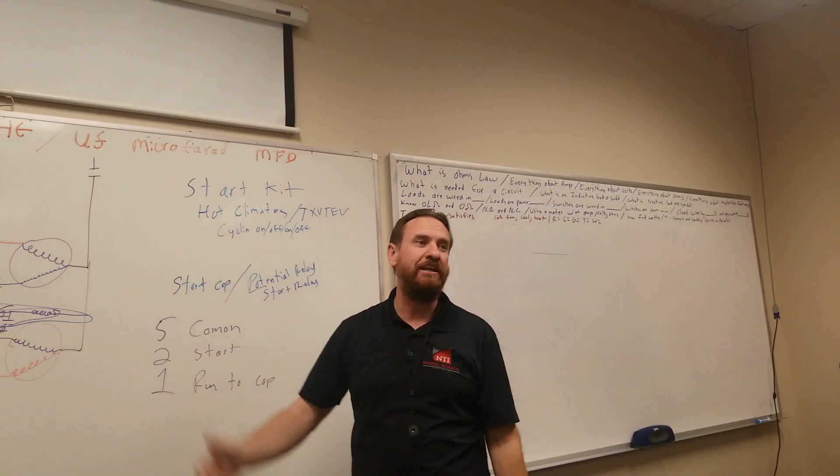No, a start kit helps the unit start. It's a much better word. When you say hard start kit, although there's so many old school guys like me that grew up with that word, it's really the improper word. It's taken me a long time to get away from that word. So I want you guys to know when somebody says hard start, but try to use the proper word: start kit. Because when you start talking to your customer, it's going to be an advantage for you to use the proper word. Okay? Any questions? None?

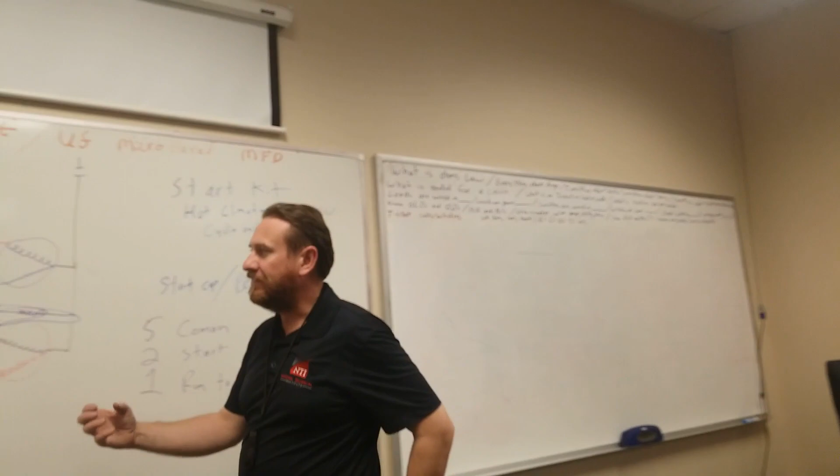Yes, sir. The cheap ones, how is it they burn out? Because they're junk, built bad. So they work differently - instead of taking it completely out of circuit, it waits till it gets hot enough. The other one uses back EMF, back electromotive force, to create an electromagnetic coil to disconnect it.

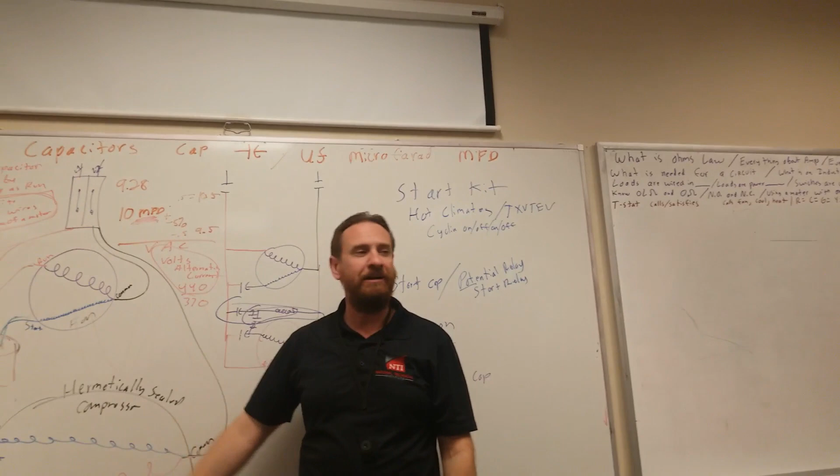So the other one just uses temperature. There's a piece of bimetal in there, and when the bimetal gets hot enough because the amps are flowing through it, the bimetal goes clink and opens the circuit up. So you're only on temperature, your temperature differs, and whether the unit's running or not running, you're either going to burn out your start winding by sending too many microfarads for too long, or you're going to burn out your start winding by the unit not having any help starting when it needs it the most. So it'll burn out the start winding.

Would you call that open loop automatic control? Yes, good, I got it. I wouldn't call it that, but yes, you could.

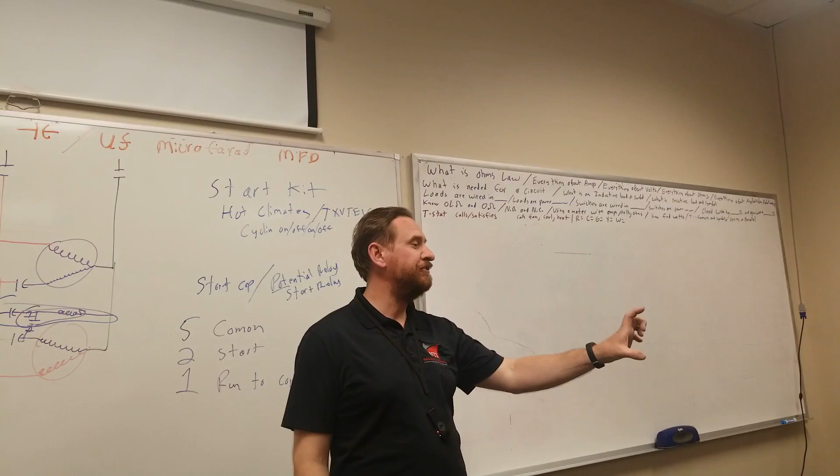And what's the difference between a start kit and a start capacitor? A start capacitor is part of a start kit - it's just a capacitor. A start kit is the capacitor and the required potential relay to make it work. And the relay is built into that big one, the relay is in the bottom. The relay is...

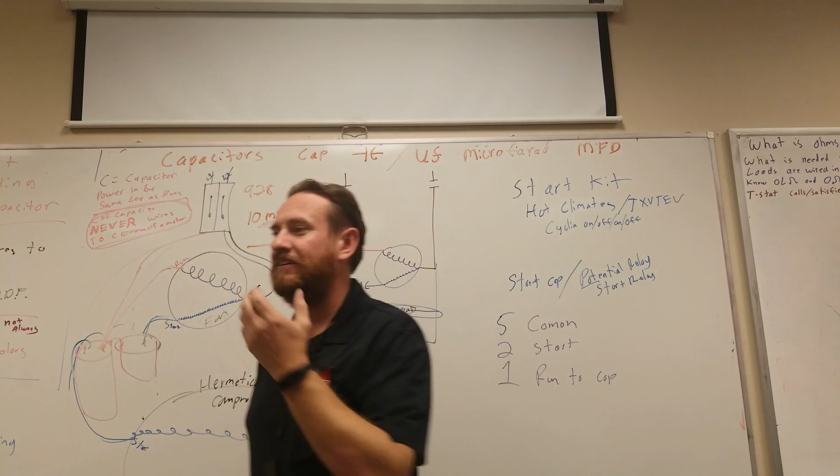Any other questions? Tomorrow we're going to hook one up in the unit so you guys can see how it installs. And till then, study, because we have a test tomorrow that we're supposed to have today.

And tomorrow we talk about contactors, the second most replaced part, and fan motors, the third most replaced part.

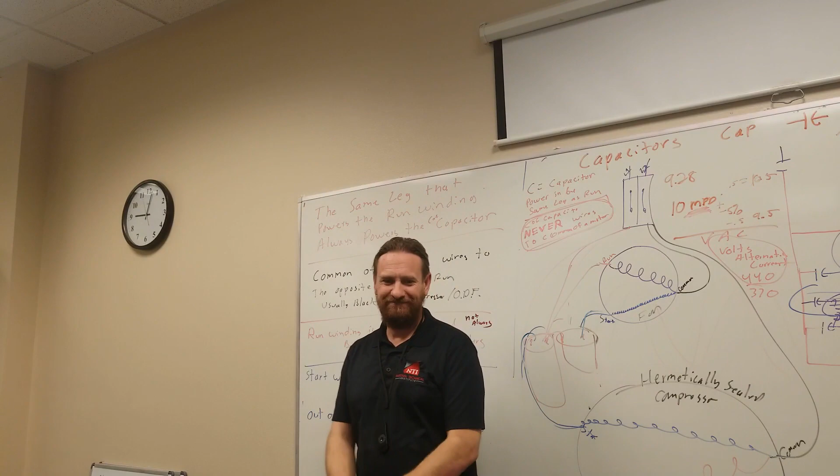What's wrong? Oh no, you good? Yeah, I took pictures. Good. Oh, we should touch this off.